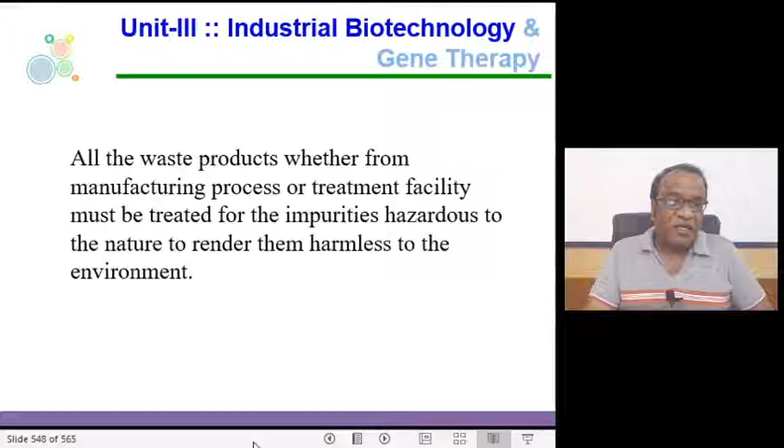And we are generating more garbage. From a national perspective, we are generating more garbage, and the interesting thing is we do not know what to do with it, and we are following methods which are ineffective or irresponsible disposal of the waste. So ultimately it is leading to the pollution of the environment, and it is also significantly posing a public health risk.

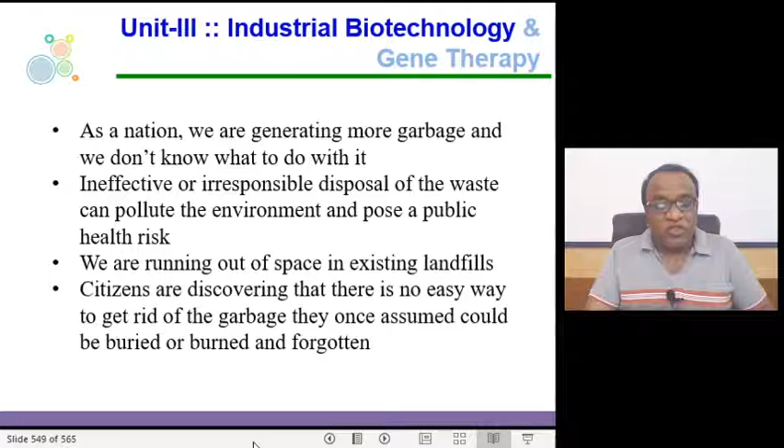The suggestion given is to go for landfill, but we are aware of the fact that we are running out of space in existing landfills. Once it was assumed that the garbage could be buried or burned and you can forget about it. But now people have realized that there is no easy way to get rid of the garbage.

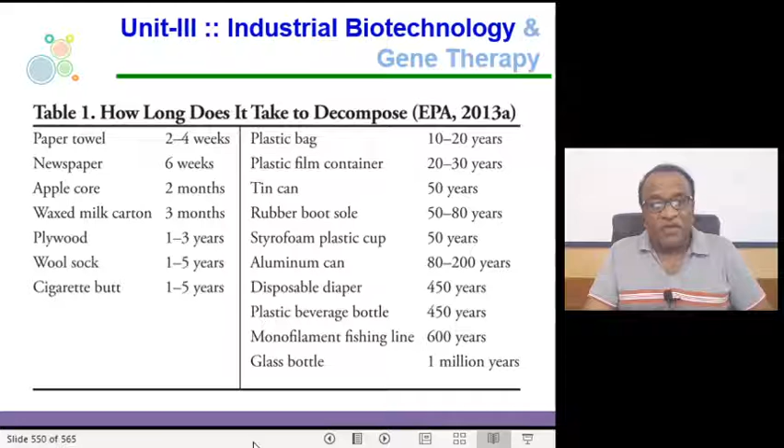and the plastic bag about 10 to 20 years, and the diapers take about 450 years, and the glass bottle takes about 1 million years for decomposition. So there is no idea about how many generations have to face these issues, right?

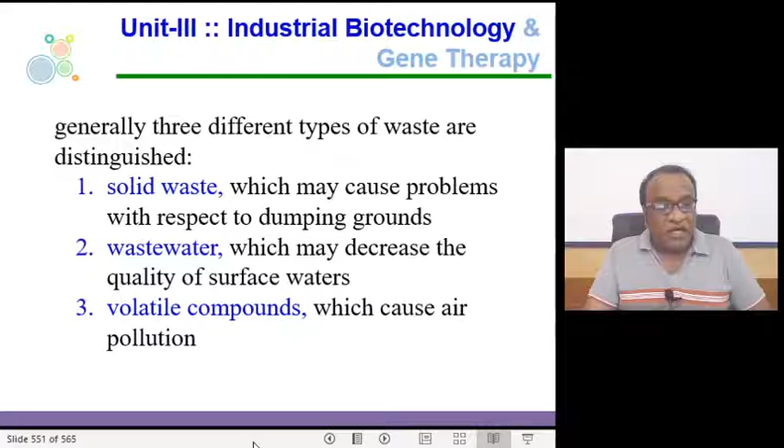So moving further, there are three different types of waste that are distinguished. Number one, the solid waste, which may cause serious problems with respect to the dumping grounds where it is actually dumped. The second one is the wastewater, which may decrease the quality of the surface water. And then we have volatile compounds which cause air pollution.

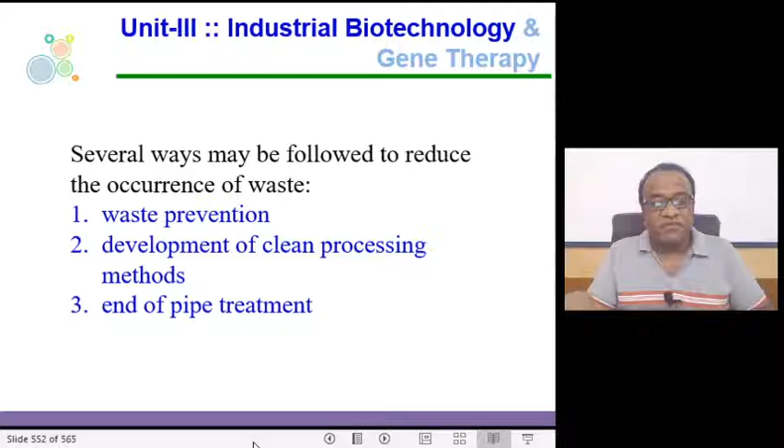But in recent times, the rate and quantity of waste being generated is tremendously increasing, and it is not only the volume of the waste that is increasing, it is also the variety of the waste. And in the prehistoric period, the environment easily absorbed the volume of the waste produced without any form of degradation. It had that capability because there was vast land and the population was small. Right. Now with this concept, we'll try to understand what is waste.

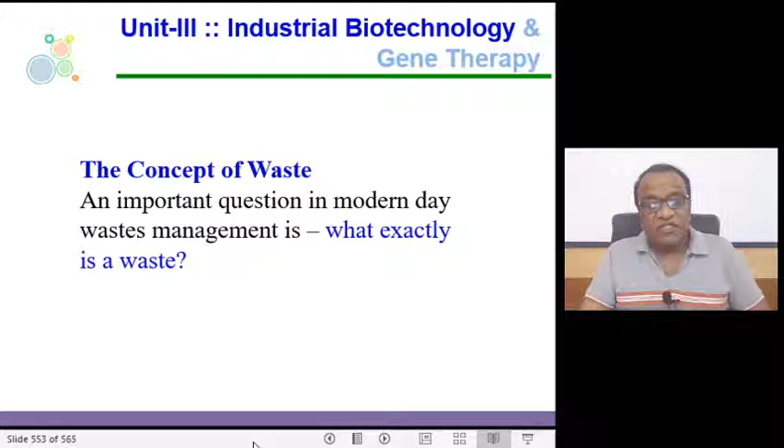So sometimes it is also defined as the product or material which is useless to the producer alone. Although waste is an essential product of human activities, it is also the result of an inefficient production process. So it is not only a useless byproduct of human activities, it is also the result of an inefficient production process whose continuous generation is a loss of vital resources.

Right. So a substance which is regarded as waste to one individual may be a resource to another individual. Therefore, a material can only be regarded as a waste when the owner or the producer labels it as waste. So it is important to describe what constitutes a waste, because the classification of any material as a waste will form the strong basis or foundation for the regulations required to safeguard the population and the environment.

Right? So if you describe a material as a waste, it is required because it will form a foundation for the regulations required to safeguard the population and the environment. So whenever you go for labeling of a material as a waste, that forms a basis for framing the regulation to dispose of that material to safeguard the population and the environment.

So understanding what the waste is, what constitutes a waste, essentially leads to the foundation for the regulations required to dispose and to safeguard the population and the environment. Right. So waste arises in many different forms and its characterization can be expressed in several forms.

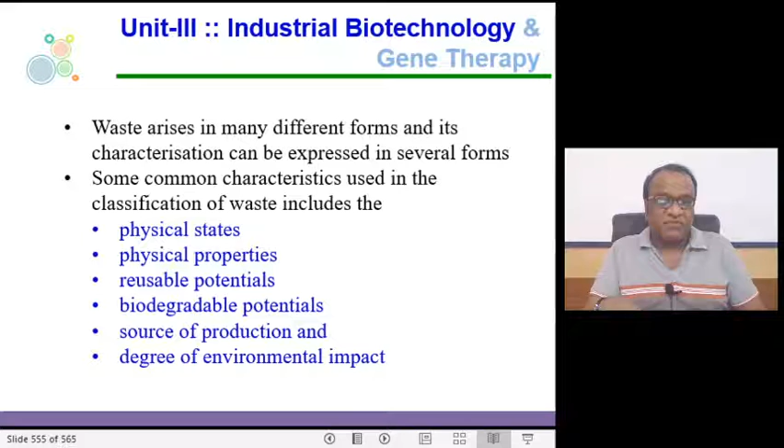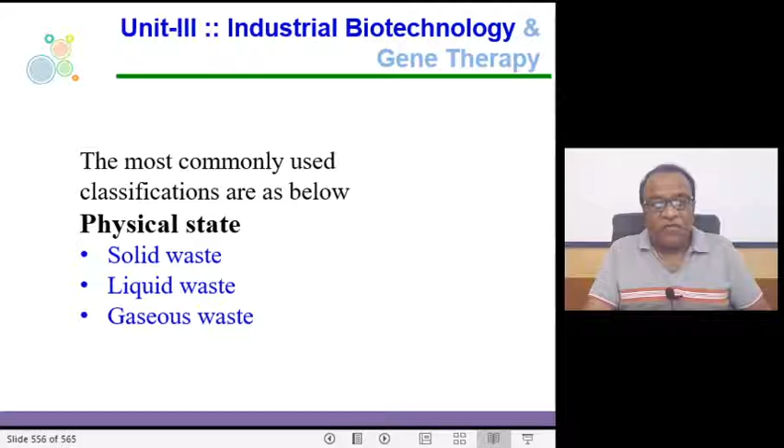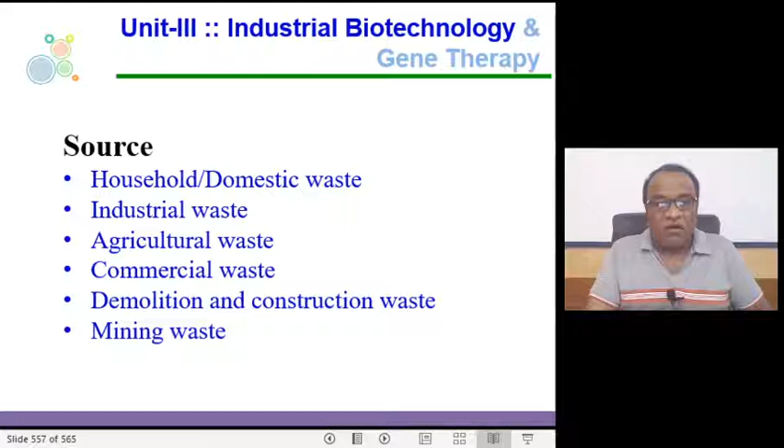The most commonly used classification with respect to physical state is solid waste, liquid waste and gaseous waste. So the classification based on the physical state of the waste is the solid waste, the liquid waste and the gaseous waste. With respect to source, we have household or domestic waste, industrial waste, agriculture waste, commercial waste, demolition or construction site waste and mining waste.

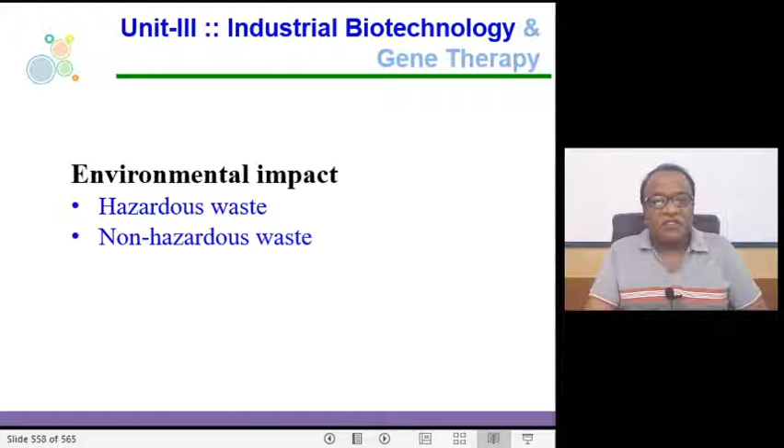Then with respect to environmental impact, we have hazardous waste and non-hazardous waste. Right. And if you look at the treatment modalities, most treatment plants follow the following steps. Number one, preliminary treatment. Number two, primary treatment. Number three, secondary treatment. And number four, tertiary treatment. So essentially, most of the treatment plants follow four steps: preliminary treatment, primary treatment, secondary treatment and tertiary treatment.

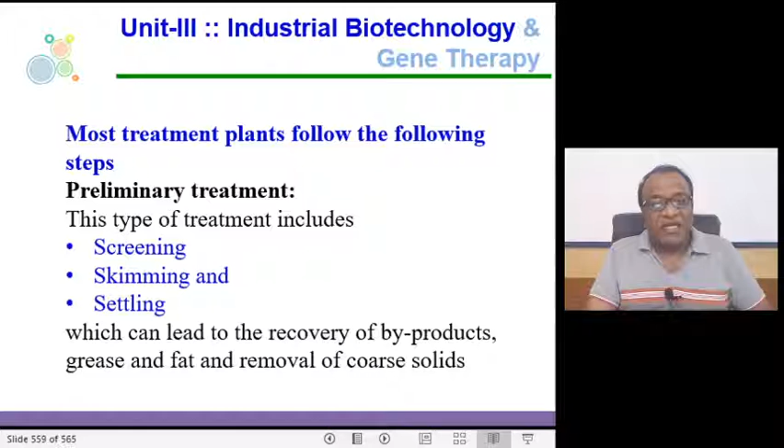So what happens in preliminary treatment? This type of treatment includes number one, screening, number two, skimming and number three, settling. So this can lead to the recovery of byproducts, grease and fat and removal of coarse solids. So you can recover the byproducts, grease and fat, and remove coarse solids, right? So we have discussed preliminary treatment.

Now what happens in primary treatment? This involves separation of solids in a settling tank, which we call the primary clarifier, or by flotation, right? The settleable solids and up to 60% of the suspended solids, corresponding to approximately 35% of the biological oxygen demand, can be eliminated during the primary treatment, right?

So the settleable solids, up to 60% of the suspended solids, which corresponds to approximately 35% of the BOD, can be eliminated during the primary treatment, one of the crucial treatment steps. And subsequently the solids may be treated by anaerobic sludge digestion. So what is the consequence of this? This produces biogas and solids that are suitable for soil conditioning and fertilization.

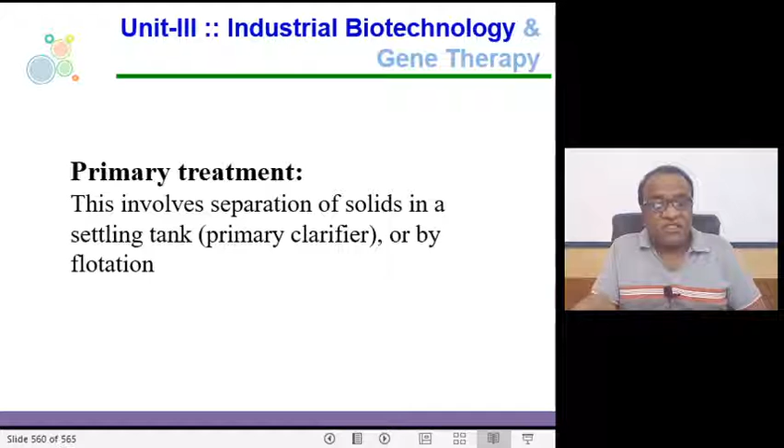So this is an essential activity, that means you cannot skip the primary treatment step, because that needs to be undertaken for proper application of the next step, that is various secondary treatment systems. In case of aerobic secondary treatment, a further function of this step is the reduction of electric energy required for aeration. Now, what happens in secondary treatment?

This usually consists of biological treatments by means of high rate anaerobic treatment systems, that is anaerobic lagoons suitable for high organic loads, or it can be aerobic lagoons suitable for low organic loads. Right. So in secondary treatment, which is about the biological treatment, the anaerobic lagoons, they are suitable for high organic loads, and the aerobic lagoons are suitable for low organic loads.

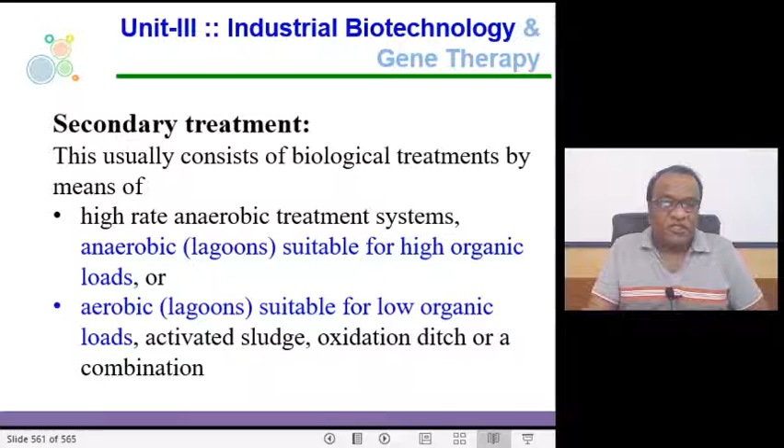Right. And in tertiary treatment, this treatment step includes chemical physical methods. And number two, it also includes biological methods. So what are the chemical physical methods that fall under tertiary treatment? Number one, adsorption. Number two, stripping. Number three, coagulation. Number four, sedimentation. Number five, chlorination. Adsorption, stripping, coagulation, sedimentation, and chlorination constitute the chemical physical methods of tertiary treatment. And in biological methods, it is about slow sand filtration and maturation ponds.

Right. So the present research, or most of the research articles, is mainly focused on low energy demand and low volume treatment systems and optimum process control. So a combination of high rate anaerobic treatment and aerobic activated sludge is required to meet effluent quality demands. Right. So the removal efficiencies reached with these kinds of combination start from 98 and can go up to 99%.

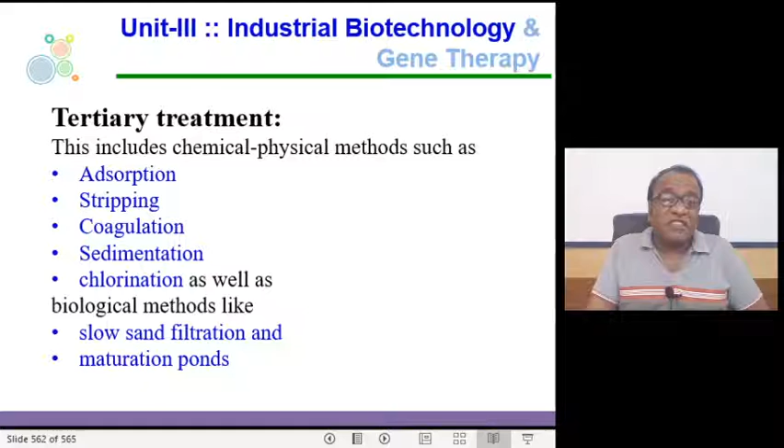So if a combination of high rate anaerobic treatment and aerobic activated sludge meets the effluent quality demands, the removal efficiency reached with this kind of approach can go up to 99%. So the process performance depends strongly on the amounts of the solid substrates that can be removed in the primary treatment step itself.

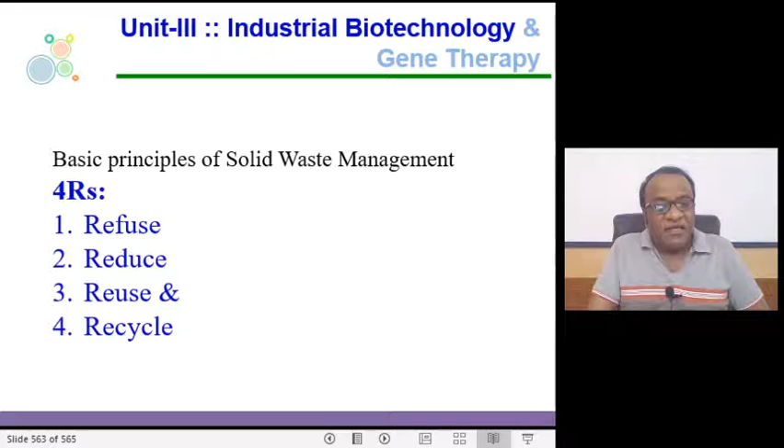Right. And if you look at solid waste management, the basic principle has 4 R's. Number 1, refuse. Number 2, reduce. Number 3, reuse. And number 4, recycle. So from solid waste management, the 4R principle is adopted. That is refuse, reduce, reuse and recycle. So what is happening in these 4R principles? Under refuse, do not buy anything which we do not really need. Right? Refuse. Number 2, reduce. Reduce the amount of garbage generated. How to do that? Alter the lifestyle so that minimum garbage is generated.

Number 1, refuse. Do not buy anything which you do not really need. Number 2, reduce, that is reduce the amount of garbage generated by altering the lifestyle so that the minimum garbage is generated. Number 3, reuse. Reuse everything to its maximum possible after properly cleaning it, and make secondary use of different items or the articles that you possess. Right? So, under reuse, reuse everything to a maximum possible after cleaning or maintaining it, and make sure that you go for secondary use of a variety of items or articles that you possess.